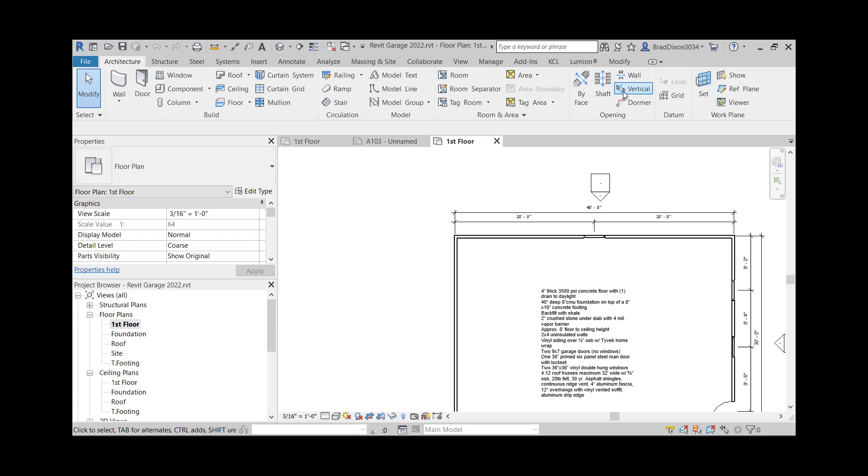Welcome back to the Revit Garage project. We are at the part where I just wanted to go over again a lesson that I thought I covered pretty well within the windows and doors, but I really wanted to make sure that you guys are getting a good understanding of this, because whenever I started checking that assignment, I saw a lot of problems with dimensions.

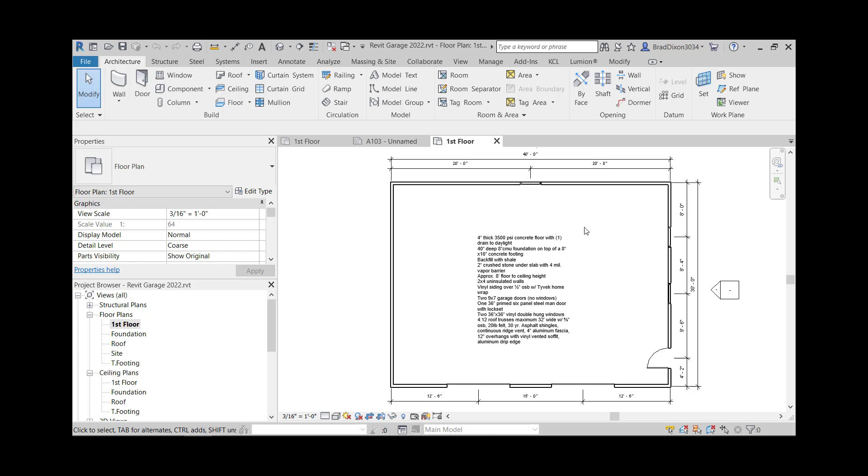So we have a certain dimension format that we're supposed to follow and how we're actually supposed to make these look. So I'm going to go ahead and get rid of these, and I have two different examples that we're going to look at. This is just a square building with some doors and windows in it. Nothing on this side. So that's one example.

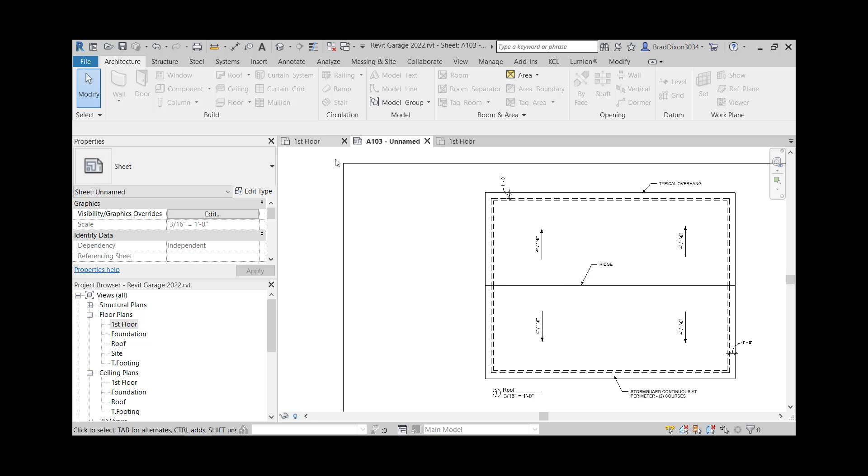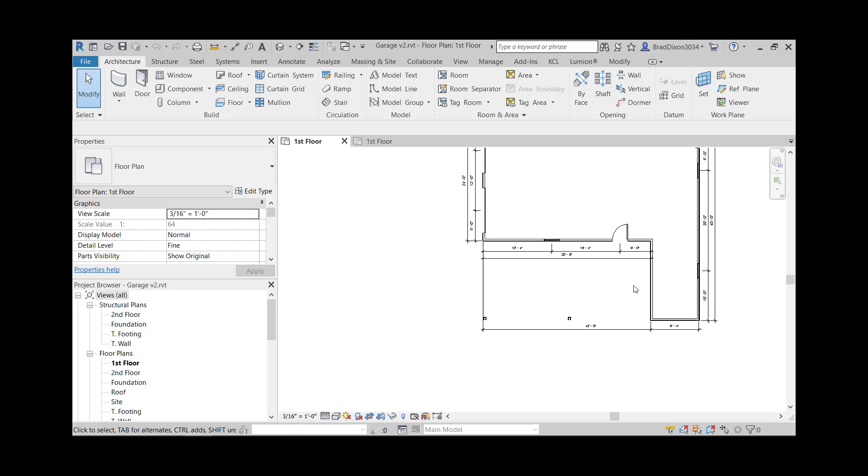The other example is a different project that has this L-shape with doors and windows in it. I'm going to start with this one, and I'll start by pointing out the problems with this. So the first problem is these dimensions right here, they should be out here. And all I have to do to make that happen is drag them out here.

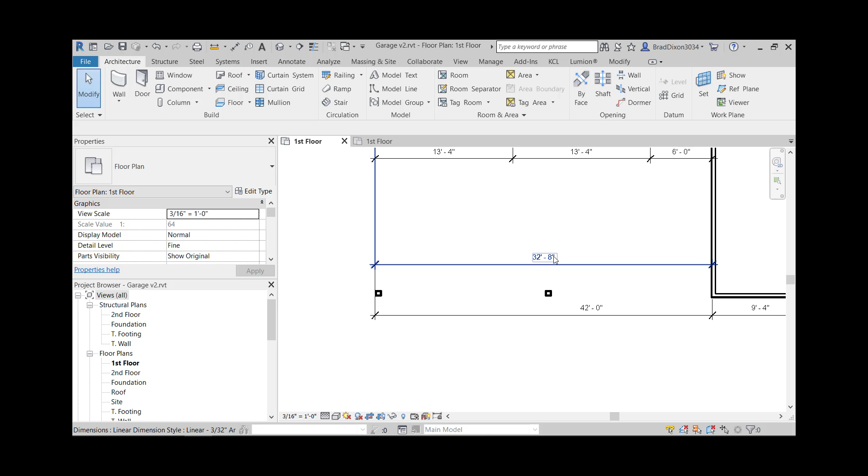So I run into a major problem whenever I look at this. This dimension here and this dimension here seem to be dimensioning the exact same thing, and they have completely different dimensions. So this one right here is really an overall dimension lined up with this. So it makes it look wrong.

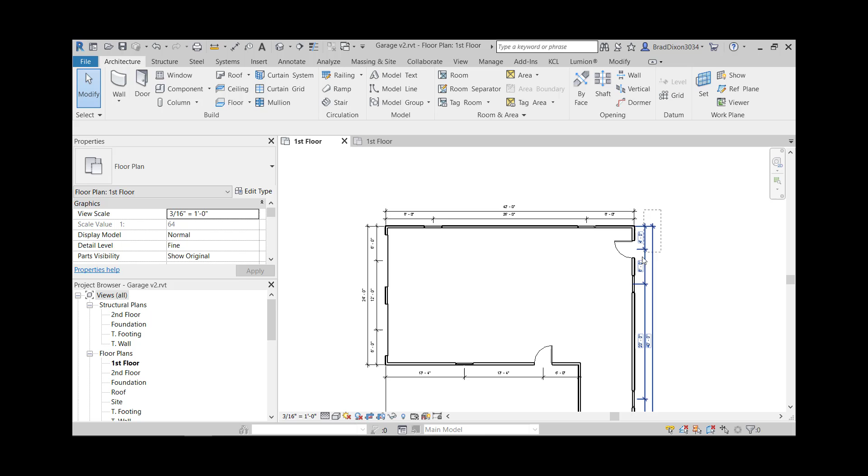It looks like the length from this corner to this corner is wrong. It makes it look like it's 42 feet, and it's not. So if I drag this out here, then you can start to see that the 42 is the overall dimension. Okay, so this shouldn't even be in here, and we got some other issues. So I'm just going to start from scratch and show you what these are supposed to look like and how you're supposed to do them.

And I always looked at it like this, the 3 O's of dimensioning. Overall, which is the furthest one out. Offsets, any offsets in the building's structure, the walls. And then openings. So we are going to go to our Annotate tab. We're going to use our Aligned. We're going to make sure that it's still face of core for what we're dimensioning.

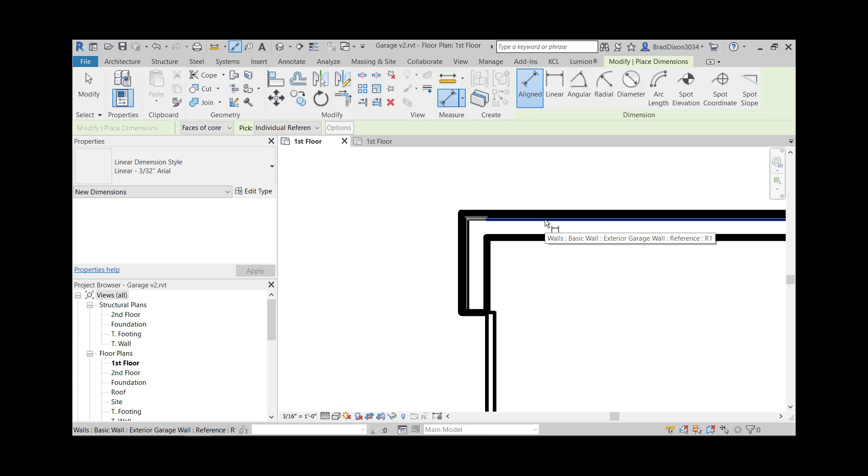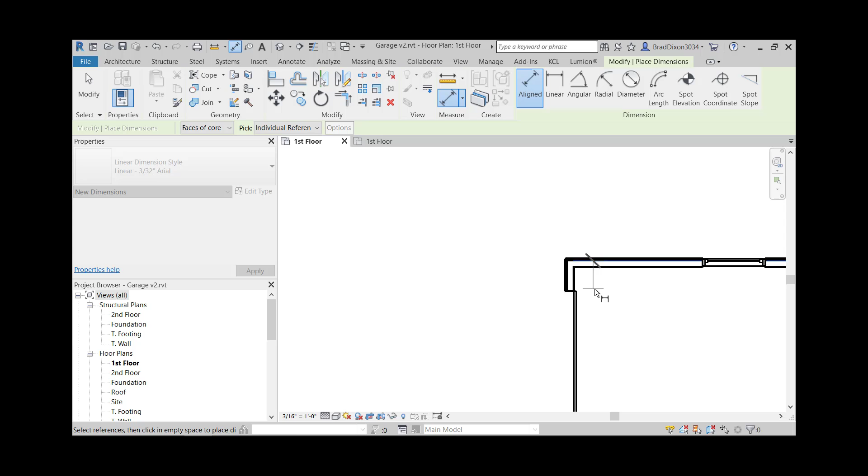I'm going to zoom in. I'm going to grab this, face of core, and then I'm going to do the overall first. So I'll grab this one, and I think I grabbed the wrong point for a second there. One more time. Grab that. And then I come down here, grab that. I bring it all the way out here, and I drop it.

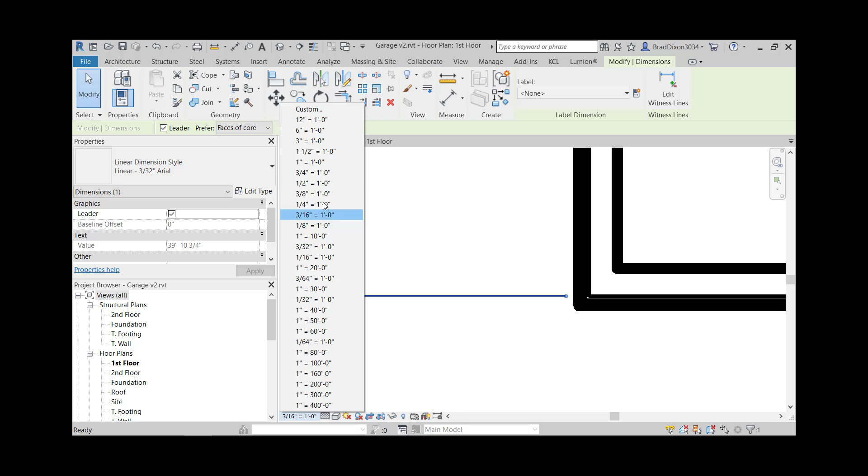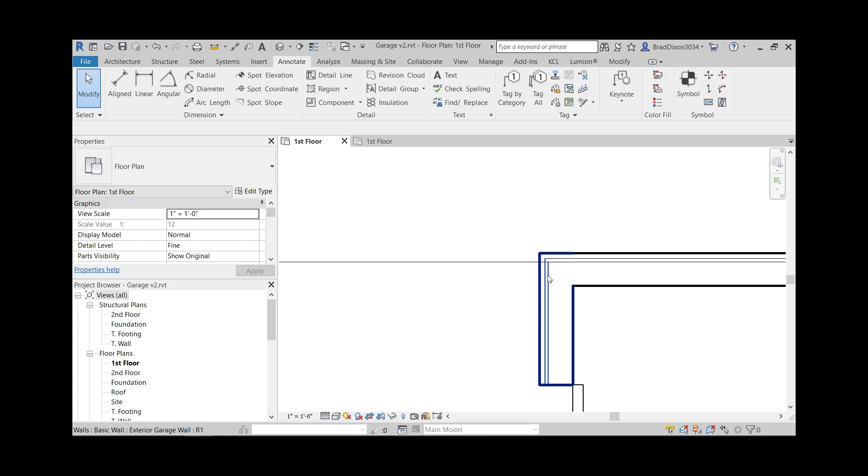So just to be able to see this a little bit better, I can bump up the scale while I'm doing this, and I see that my overall dimension is not modular. So I have 39 feet 10 3/4. So I'm just going to double check both of those, and then I would have to make it correct. So before I do that, I'm going to check this one in here.

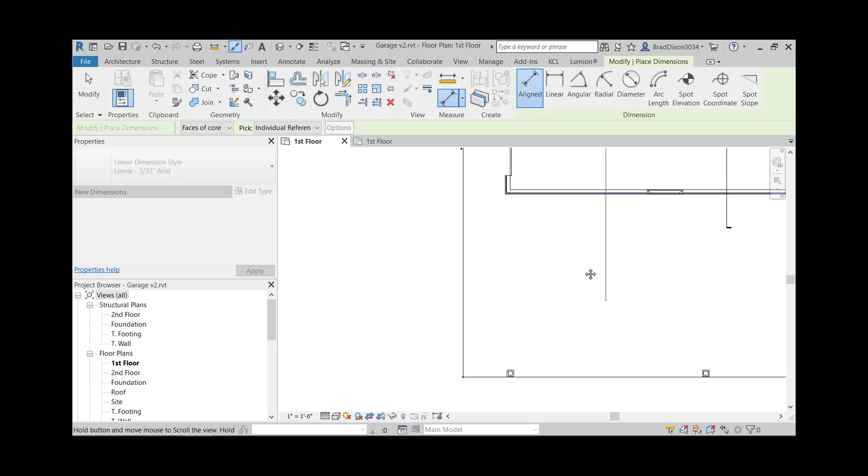I'm going to go to Aligned. I'm going to dimension that, and I'm going to go to that one, and then I'm going to complete this string by going there. So on this one, I picked up the offsets. And I can bump this scale back down to something where I can actually see what they say. So again, it's not modular. So I'm going to be checking about 3 or 4 different things through this process.

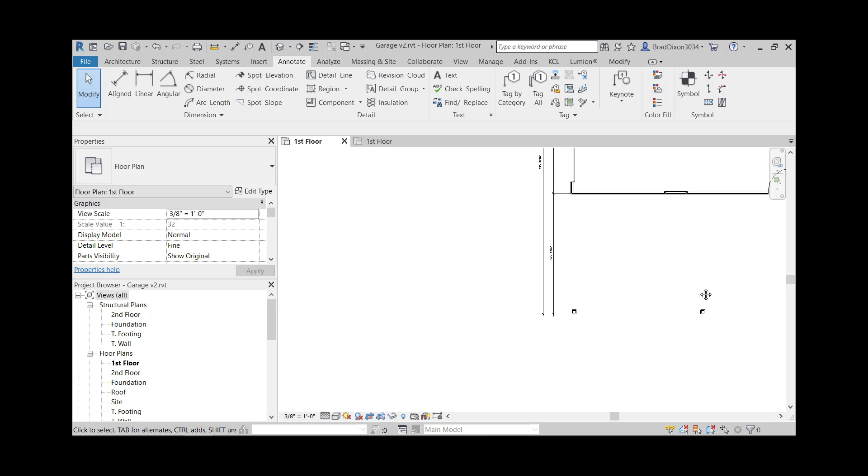So at this point, before I do anything, I need to get these things modular. So I know that this needs to be bumped out to 16 feet. This one is correct. So I can literally just grab this little chunk here, that wall, and this dimension becomes highlighted and I say 16. So now that fixed everything. Now this is 40, that's 24, this is 16.

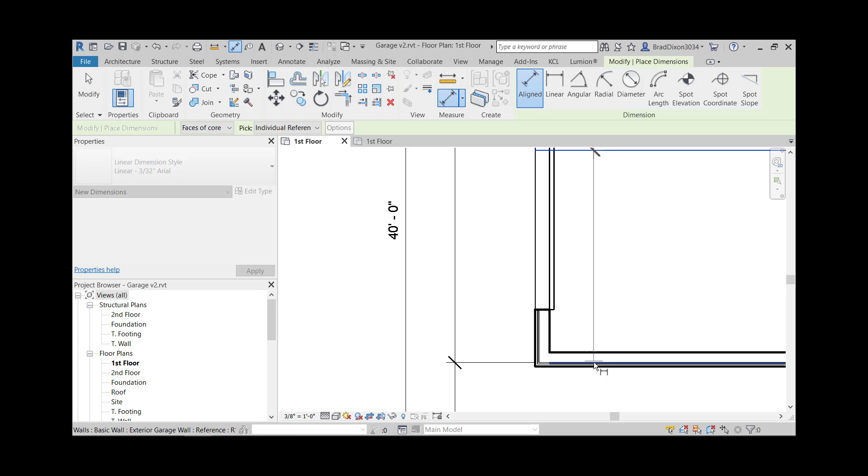Next, I will dimension the openings. So in a framed wall, I dimension to the center of the opening. Align, dimension, faces of core still. I choose that line, the center of the opening, and then I go to the center of the next opening, and then I finish it off by selecting that final wall. I drop it right there, and I have my first string of dimensions away from the

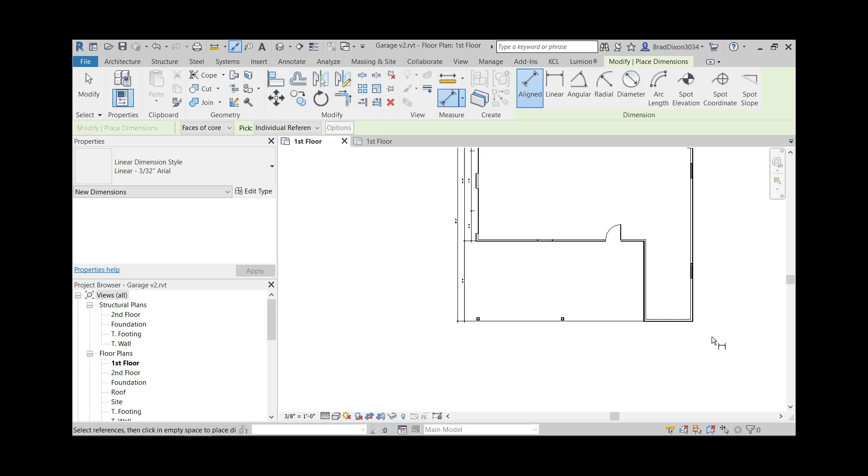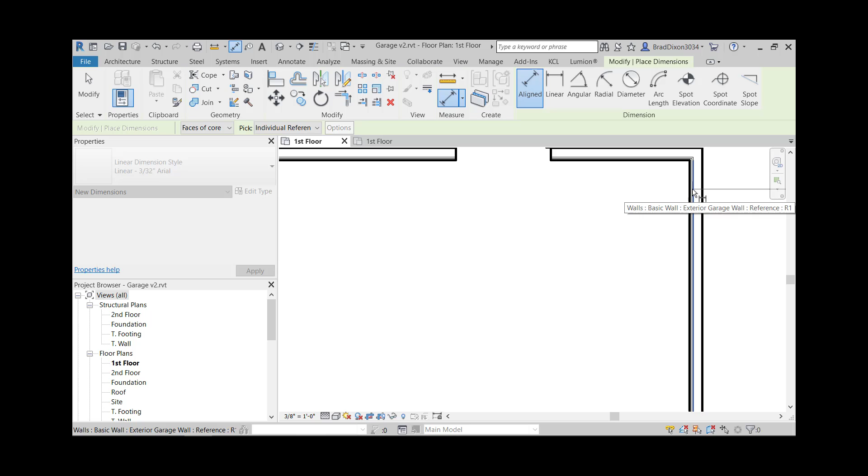building is my openings. The next one is the offsets. The final one is the overall. I do the same thing on this side. Overall, I'll start out here, bring it out here. The next one, I'll do my offsets, so I'll start there. And I'll bring that all the way out here. So again, those look modular, so that's good.

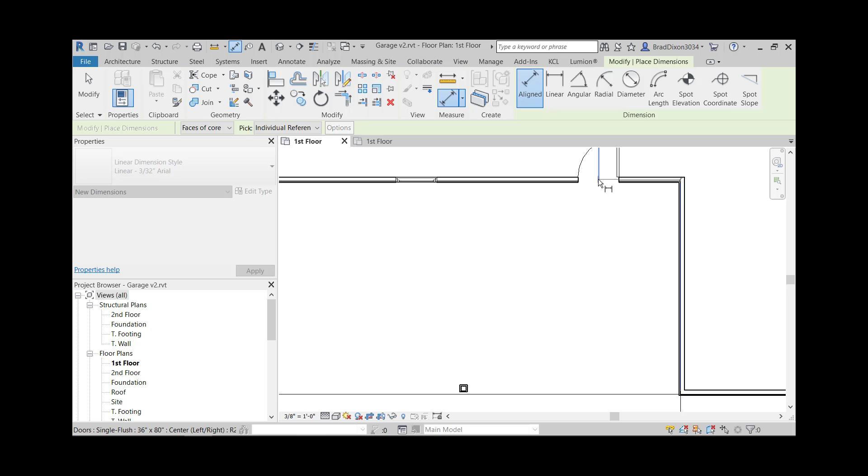I have no openings in this side of the wall. None. So I don't need a string of dimensions for that. I do have 2 openings in this part right here, so I'm going to start that, instead of putting it in here, this dimension, I'm going to start by going from that wall to the center of that opening, to the center of that opening, and then I'm going to complete the string out here. I'm going to bring this out here.

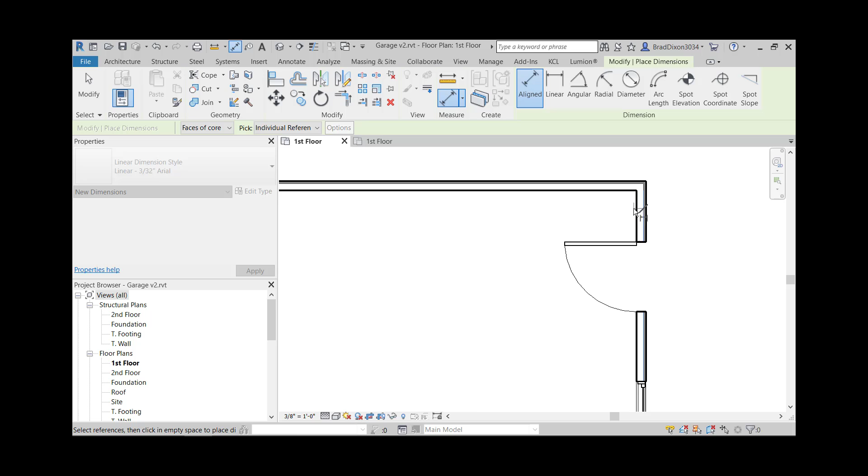So again, the format is openings, offsets, overall. Openings, offsets, overall. Those 3 strings. I'm going to pretend for a second that I had no openings on that side, just so that I can show you what it looks like. So on this side, I have no offsets, I have no openings, all I have is an overall. So I only need 1 string of dimensions out there. On this side, I only have openings and overall.

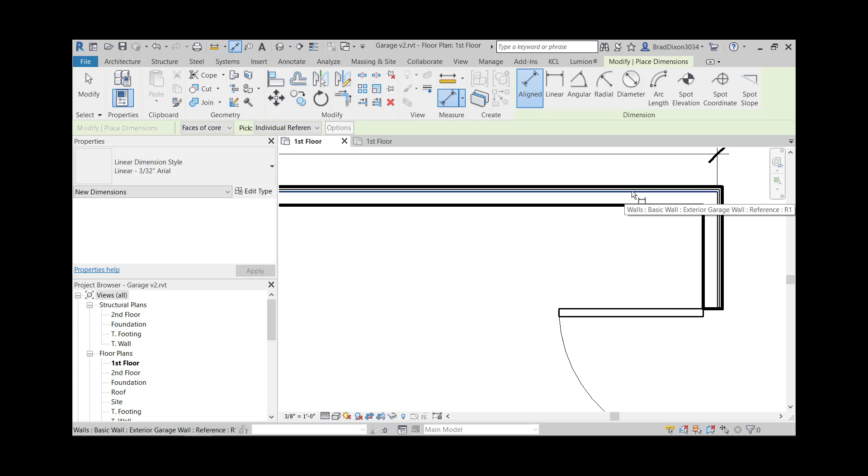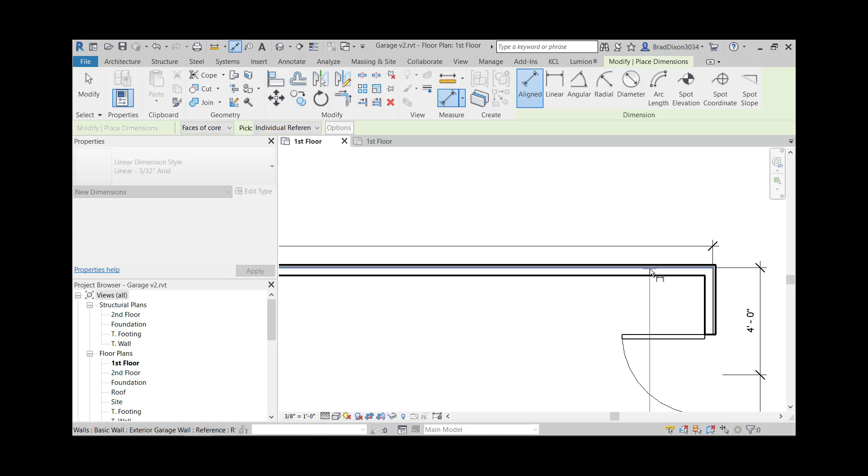So the first one I'm going to do my openings to the center of the openings. I'll reiterate that, tell you that again. Bring this out, drop it like it's hot. Then do an overall. Drop it like it's hot on the outside, and this, like I said before, I just have openings and an overall. That's how I would dimension this one.

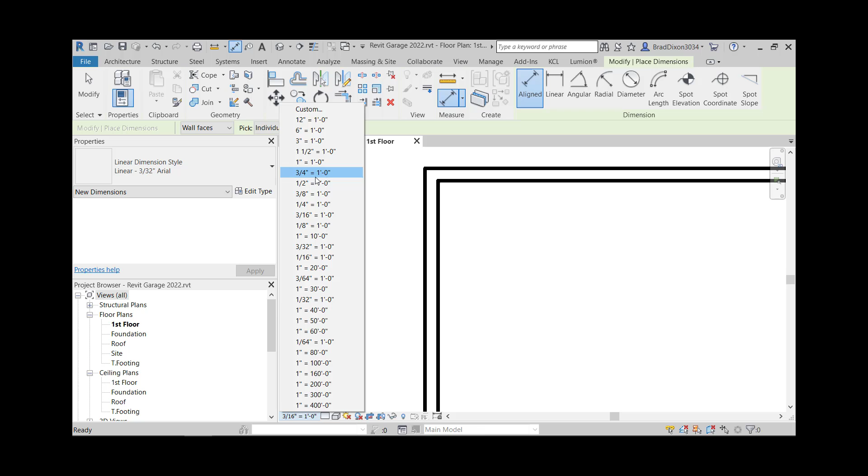Real quickly, going to this basic 30 by 40, I'm just going to quickly go through and do this one as well. This side over here, first of all, this is a completely different set of drawings, so I'm going to bump the scale up a little bit so that I can see that, make sure that I'm dimensioning to the face of core, choose my aligned, and I'm going to select that, and I'm going to select that. Oh, jeez.

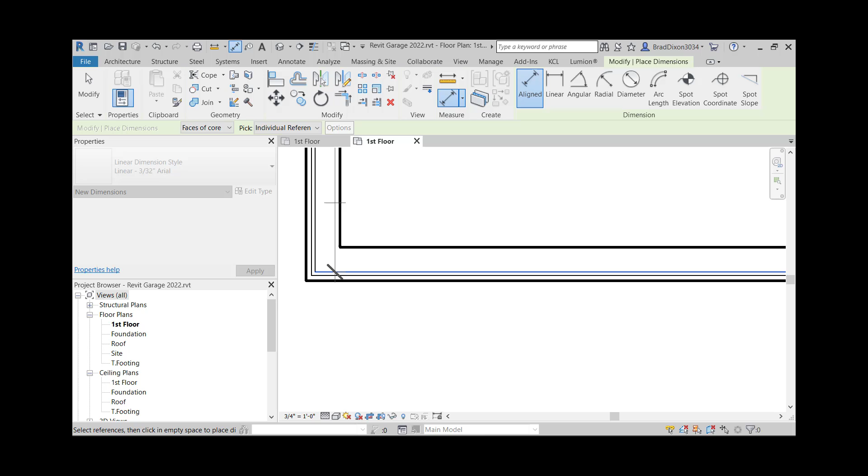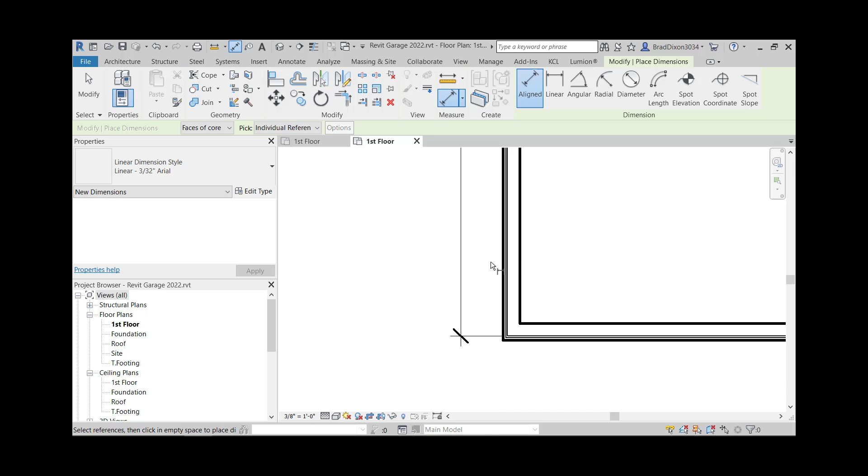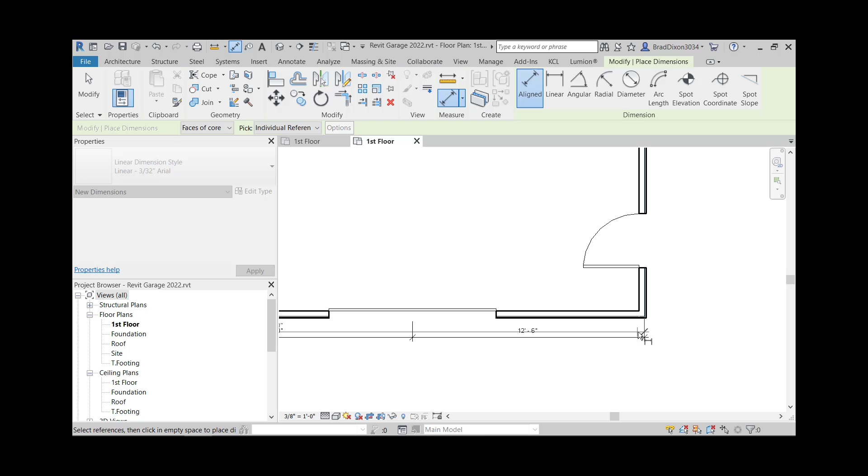So then I do my overall out here, and I'm going to use something a little bit smaller than 3/4. I'm going to try like 3/8, like on the last one. So I got that dimension. Again, it is modular. This one has openings. So I'm going to dimension to the center of the openings because it's a light frame wall, and go complete the string, drop that right there, come back, do my overall, put it out here like that,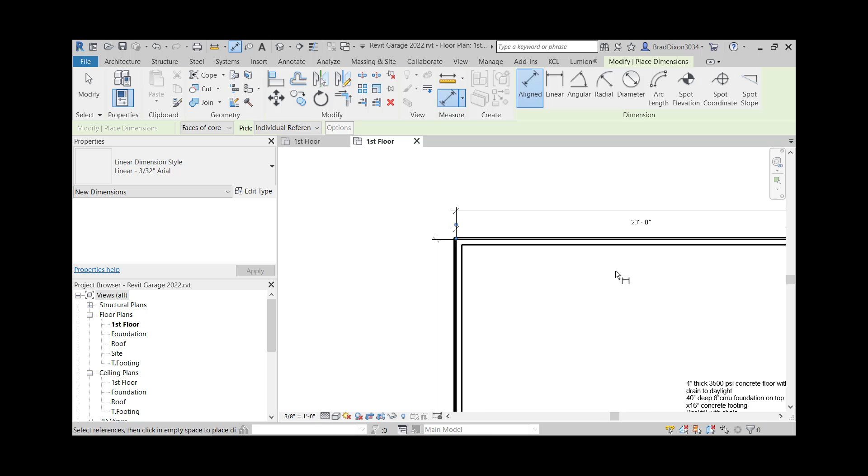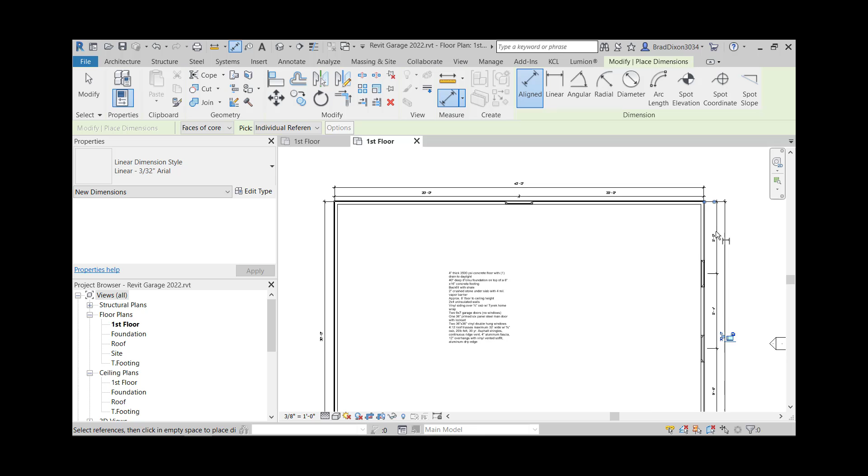and just very quickly dimensioning to the center, completing the string, dropping it, doing another string that does my overall, drop it out there. One more time. For anyone who missed it the first few times, to the center, to the center, to the center, complete the string, pull it out here, drop it, bring this one out, drop it, and that's how I would dimension this one.

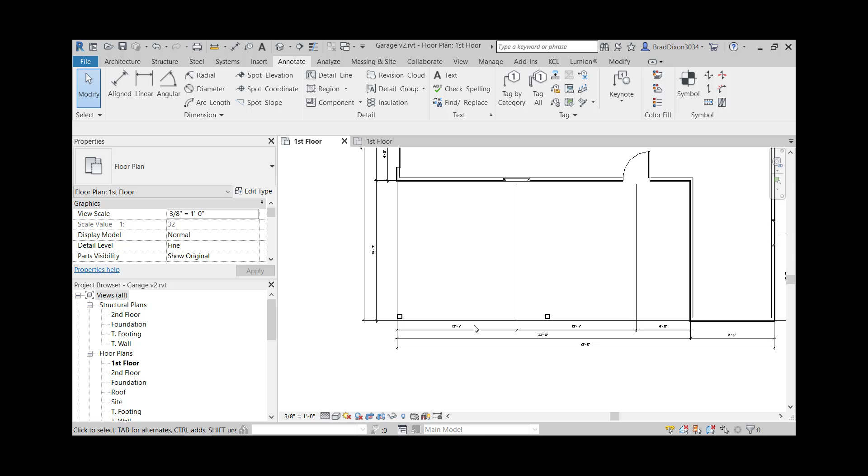So in the assignment, I will be checking for, first of all, that the dimensions are modular. Second of all, that you follow the format where we have openings, offsets, and overalls, all included as needed and in the correct location outside of the building. And I'm going to also check to see that the dimensions are dimensioned to the center of the openings.

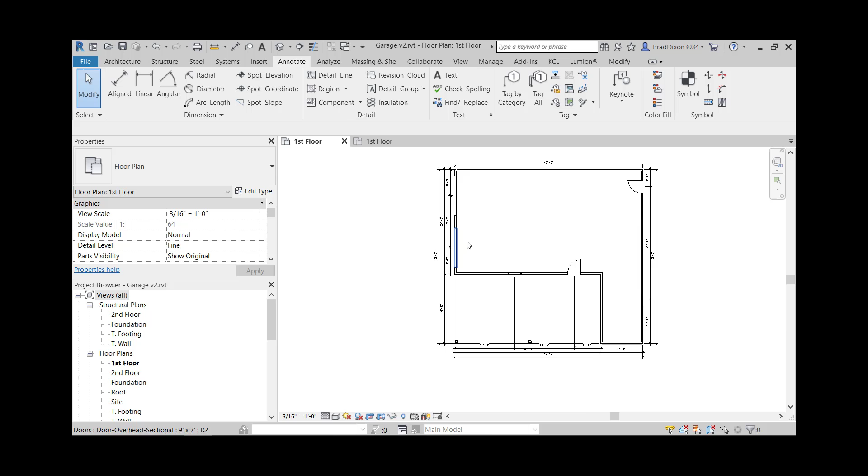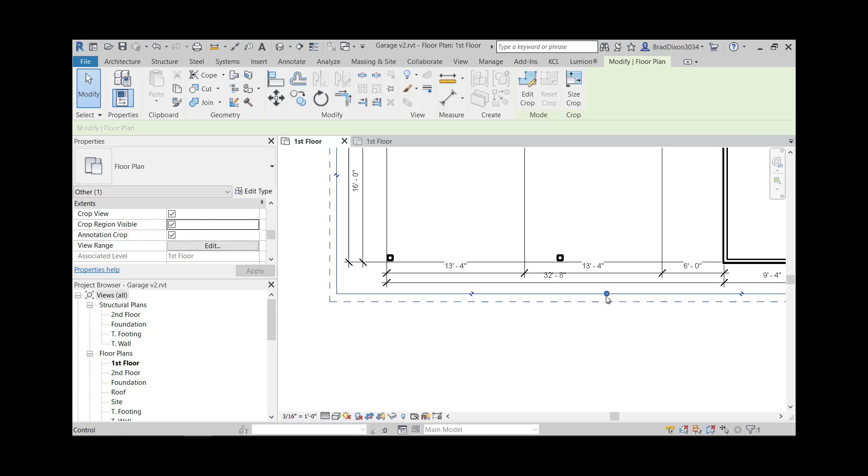Finally, whenever I'm done, I'm going to turn the scale back to what I'm actually using, and it's going to make things a little uglier, make them not fit as well. So if I need to do any adjusting like this, I can bring this out a little bit further, and right now the crop region is basically way close in there, so I adjust that crop region and I start bringing things out a little bit further so that they're a little bit easier to read, a little bit neater looking.